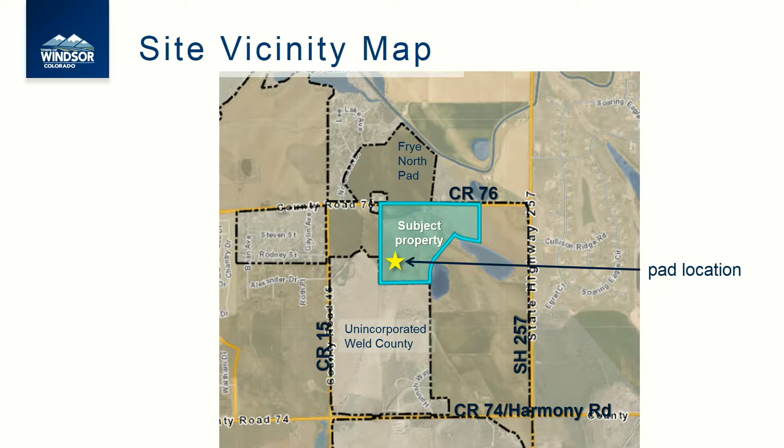In addition, the town board has adopted some standard conditions of approval, and I'll get into that in a minute. This property is located south of Weld County Road 76, west of Highway 257, north of Harmony Road, County Road 74, and east of County Road 15. This property is zoned residential mixed use, and oil and gas is allowed in the residential mixed use zone district with a CUG.

The site is located considerably further away from residential subdivisions as compared with some of the applications you've seen in the past.

One of the outcomes from the neighborhood meeting was a different truck route than was originally proposed. Originally, the truck route was proposed to head west on County Road 76, and since the neighborhood input, the route was changed to head east towards State Highway 257. It then follows a primary route down Harmony Road to I-25, and the alternative route would head north on 257 to State Highway 14 and then out to I-25.

The access is from County Road 76, and during this process, staff had the applicant, Extraction Oil and Gas, enter into an agreement with the town regarding maintenance of County Road 76, since that is within the town limits. That agreement states that any damage or repair necessary for that roadway will be done by Extraction.

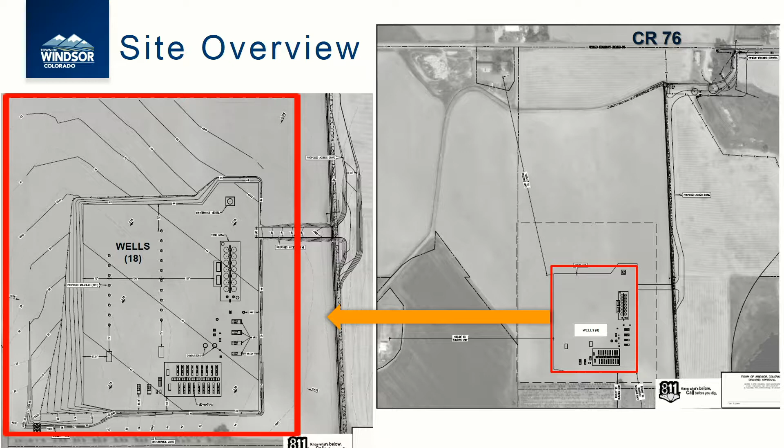So the overall site, the property boundary is 94 acres, but the pad site itself is 18 acres. 18 wells, associated equipment, and here just showing the closest occupied structure to the west, 994 feet, to the south, 810 feet. And then further to the west are the Ross subdivision and Alexandra Estates, 1,200 feet and 2,400 feet to the west and northwest.

This was the area that was notified for both the neighborhood meeting and this public hearing. In addition, prior to the neighborhood meeting, the applicant reached out to members within the subdivisions to the west, and we did have a good number of attendees from those subdivisions. There were roughly 35 people who had general questions and were definitely concerned about the proposed truck route to the west, and again, that was changed.

So staff's recommendation is for approval based on the criteria in the code, meeting that criteria. We've also included the town board's recommended conditions of approval for oil and gas facilities. There are 3 specific conditions that pertain to this site.

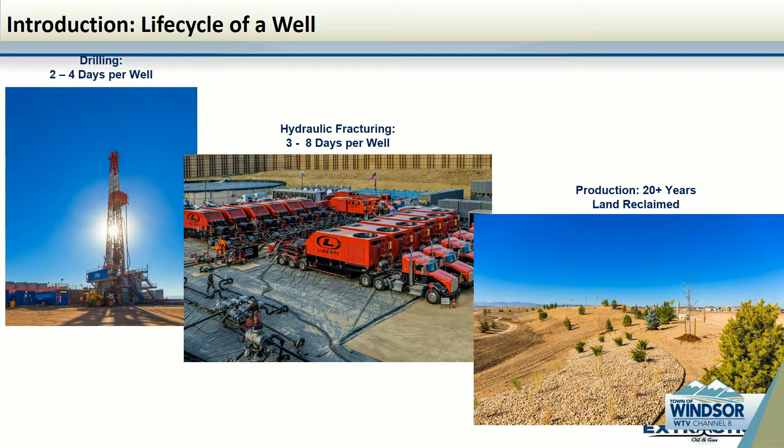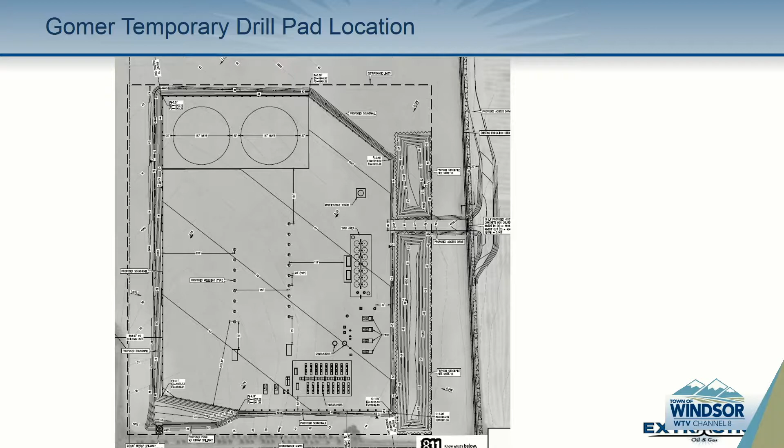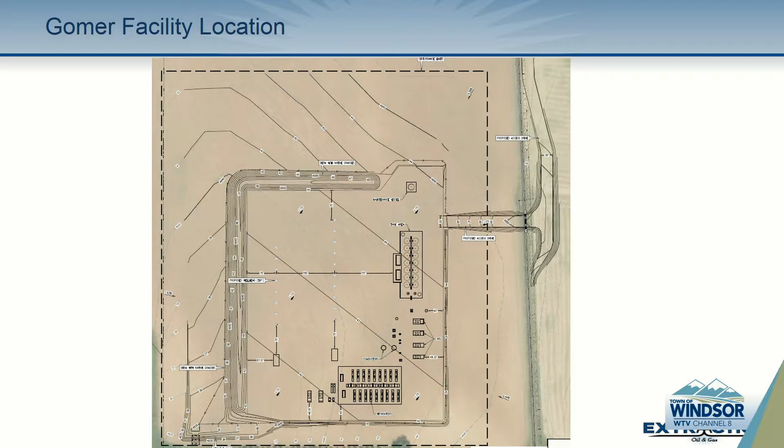Just a little bit about our BMPs as a company that we've developed over the last couple of years. In the drilling process, this is where we set 3 layers of steel casing, then put in 3 layers of cement to make sure all the water is protected. We've increased drilling speed by about 4x since we started - it's probably the biggest innovation we've had.

We've also pioneered bringing sound walls down into the basin to help mitigate sound. We also have new LED lights and light shielding that we put around the inside of the sound walls, as well as on the rig, to try to mitigate any lights from shining outside the site.

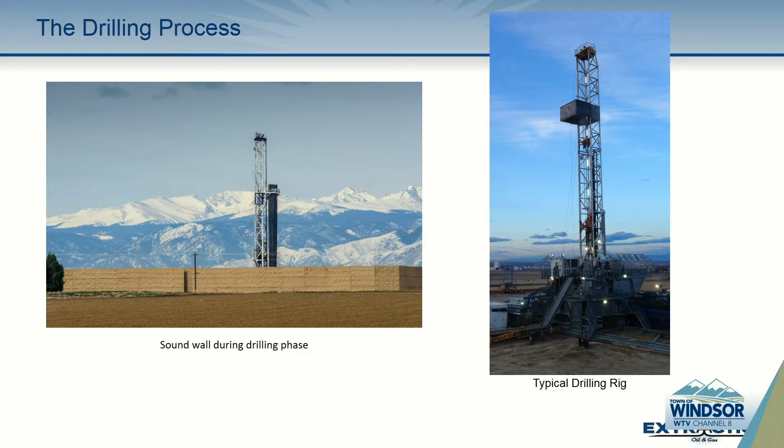This is a little bit about the hydraulic fracturing phase for completions. We do this process to establish communication between the producing reservoir and the wellbore that we drilled.

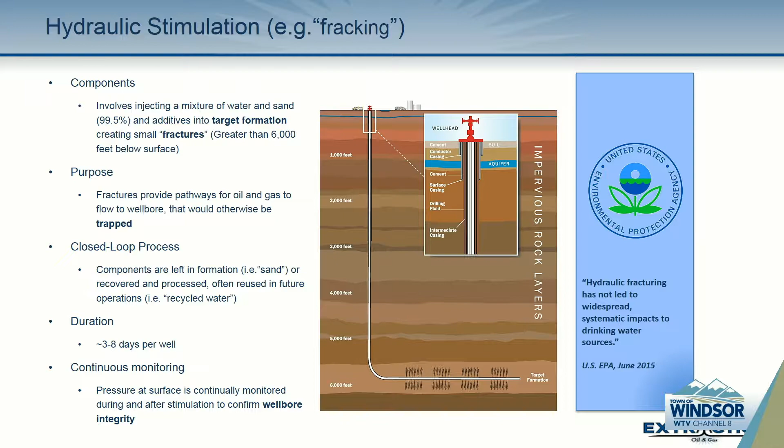A couple things we do here: we eliminated water truck traffic, which was the main cause of traffic during the whole process. We did that by getting local water sources and using lay flat pipe, so we don't have to bring water trucks in.

We also helped pioneer with Liberty the new sandbox system, which we've been using for a year or two now, which reduces traffic by bringing in more sand at one time. It also greatly reduces dust produced on site - before, you'd have a sand truck, blow off, and make all these connections that created extra silica dust. With this process, it's a completely enclosed system, no need to worry about any of that. It also allows trucks to get in and out much faster, when it could take an hour or two for a sand truck to unload before.

We also partnered with them on developing the quiet completions fleet, which we rolled out in the last 18 months, I believe, and this has greatly reduced sound - it's been great for sound mitigation. Our goal with completions is just to get in, get out, and do it safely.

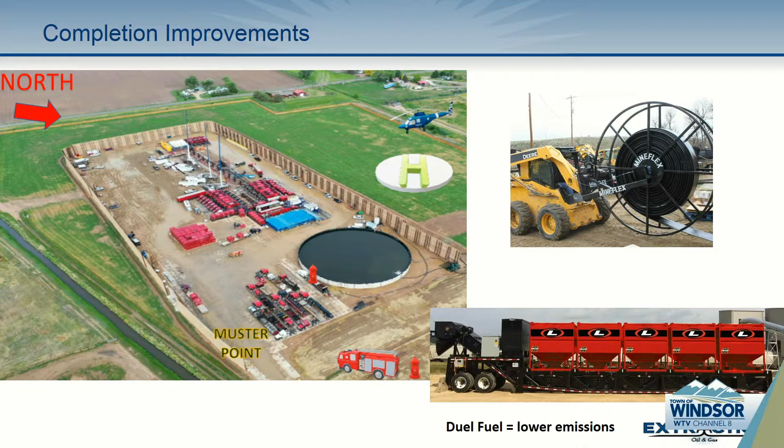A little bit about the production facility that'll be there after we're done with drilling and completions - this is what'll be there for 20 to 30 years. It's a completely enclosed system; we don't have any flaring, venting, or open flames. We also have a new LACT system, which helps mitigate emissions as well as spills, by allowing trucks to have just one connection point. They no longer have to go onto each tank, measure, and open hatches or anything like that.

We're also working to get a pipeline here. We're very close, which will help greatly reduce any truck traffic during the production phase. We'll also have electricity from the utility powering the facility, which will help reduce noise, since we won't need loud generators, and also reduce emissions at the facility.

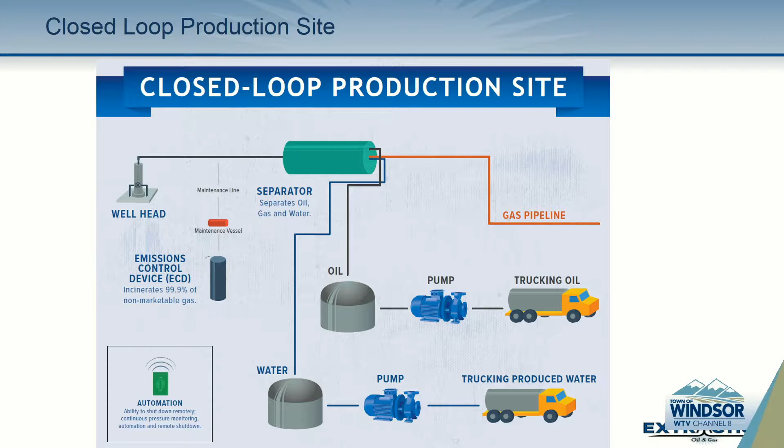We also put shielding on all of our lights, and we always have a 24/7 hotline people can call. If a light got misplaced and is shining somewhere it shouldn't, we'll have someone out there right away to point it back down.

Finally, a little bit about our air quality. We try to capture every piece of gas we can through 3 or 4 different separator processes, and anything we can't sell directly down the gas pipeline, we incinerate in a 99.9% efficient incinerator. We also have a pretty robust LDAR program, leak detection and repair, much more robust than what CDPHE and the state require.

For the first 6 months of the production cycle, we'll have someone out there at least once a month, if not more, with an infrared camera powerful enough to see gas vapor coming off, even something as small as taking the cap off a permanent marker. That continues for several years, then we slow down to once a quarter, and eventually once or twice a year. In Extraction's whole history, we have one pad on that semi-annual schedule — all the rest we're out there at least once a month checking.

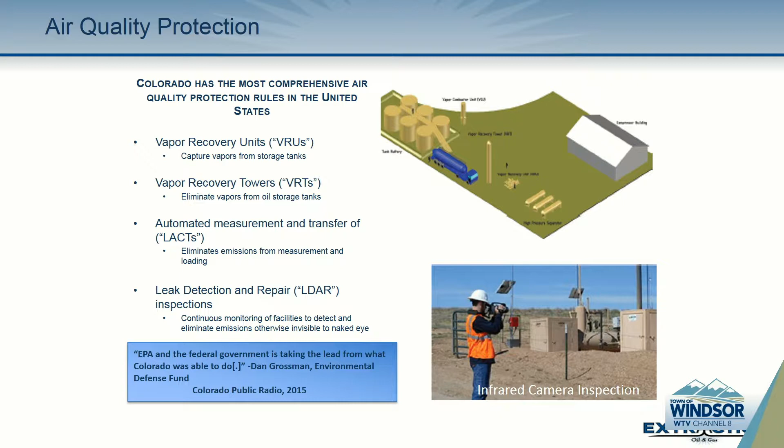And that's about all I had for the Gomer pad. Thank you, Troy.

Does the commission have any questions or comments? I was curious if you've seen the memo from the fire department. I don't think we have. Do you have any problems with that, or is that stuff you normally do? Yes, that's stuff we normally do. We usually do a tactical response plan with a person in-house — Jeff Annable, 10433 Yosemite Street, Commerce City, Colorado. We have a tactical response plan that we do uniquely for every site, and we coordinate that with them. You have no problem incorporating what they have? Yep. Okay, thank you. Anyone else have any questions?

Chair, I just had a follow-up for staff: will the fire department's requirements be codified as COAs on this approval? Is that something we need to take action on? Will the fire department's requirements be a COA attached to the conditional use permit? They are — they're the very last condition of approval in your packet. Okay, thank you.

Any other questions? Just a comment — you have the alternate route going up, and the primary route going over Harmony. I'd think it'd be good to consider making the alternate route the primary, since Harmony's going to be under construction for probably the next 5 years or more, so it'd be best to keep that traffic away from Harmony. Thank you.

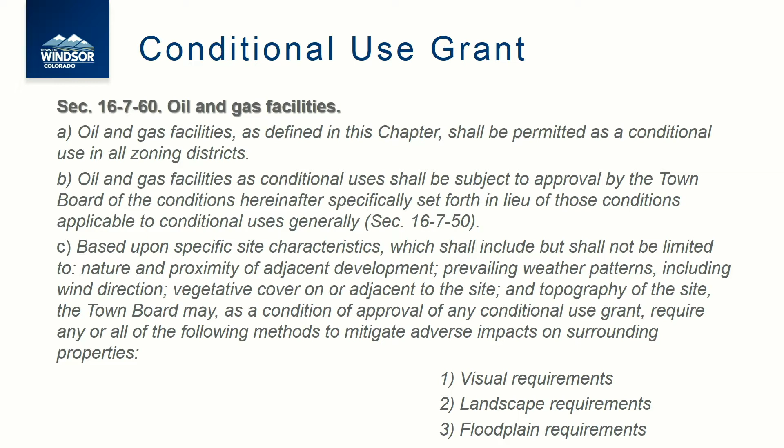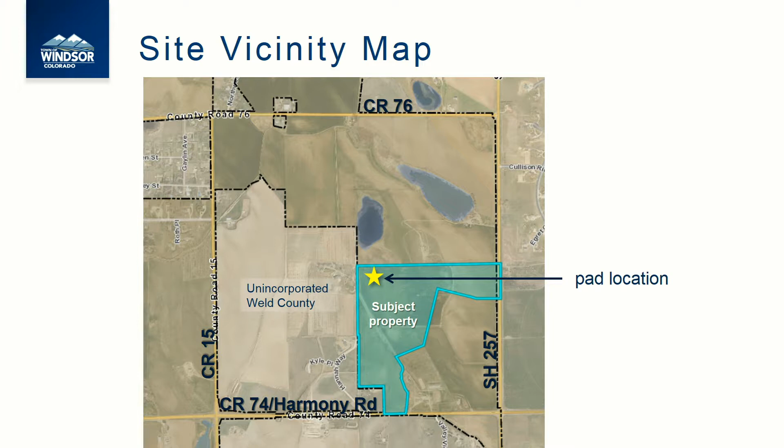This property is located southeast of the Gomar property, just west of State Highway 257 and north of County Road 74, Harmony Road. This property is zoned general commercial. As you might recall, this was once the area proposed for the sports park.

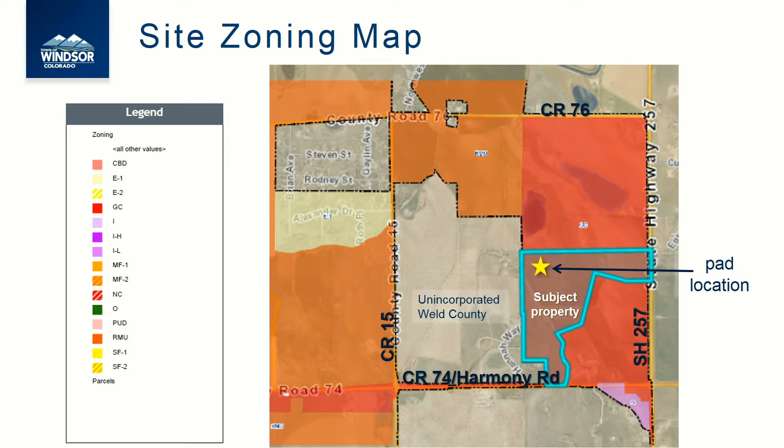They will have the same truck route for this facility. I've noted your comments, Commissioner Bushelman, and we'll speak to the applicant about the concerns on Harmony Road. It will certainly be under construction for a long period of time, so we want to look more closely at the alternative route and when that could be used.

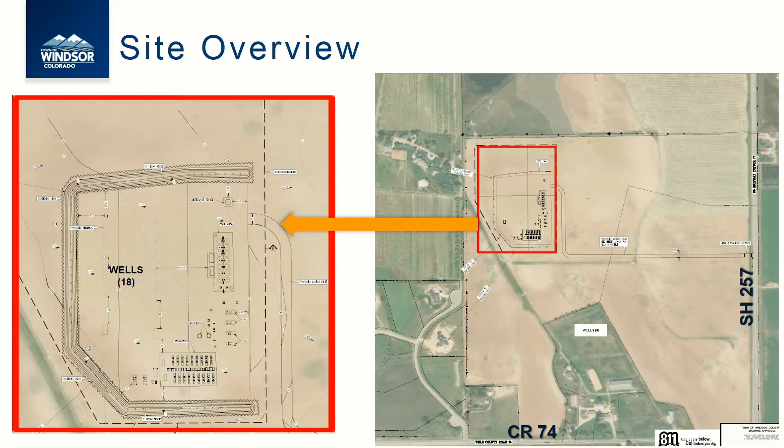This site is also not directly adjacent to high-density residential. 18 wells and associated equipment are proposed. You can see here a few of the neighboring properties with single-family estate homes. The overall property has 79 acres with a 14.7 acre pad. The distance between the property and the closest occupied structure is 582 feet to the west and 728 feet to the southwest. The applicant is also proposing sound walls, berming with landscaping, and electric facilities similar to the other site.

The conditions with this proposal are identical to the prior one. The planning commission and staff comments are addressed, with three specific to the site: the truck hauling route as shown in your packet, the truck hauling periods, and the berming and native seeding completion no later than 90 days after production has begun.